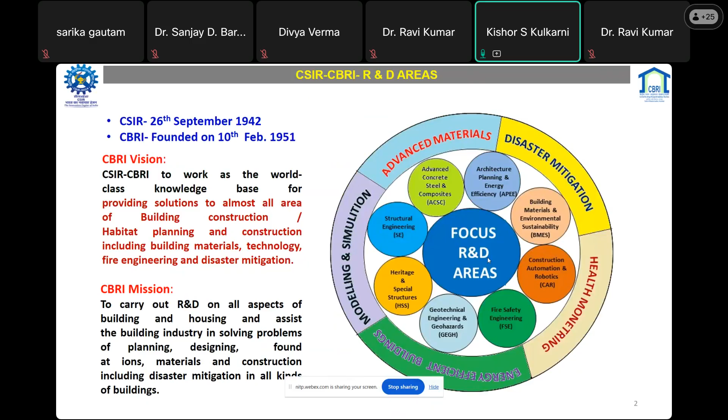As you are aware, we are facing a lot of challenges today, and there are certain issues. The challenges are with respect to some of the natural resources which are getting depleted. So we are facing a crisis on that, and also because of some man-made disasters. Because of that, we are facing this problem, and we can say climate change is the biggest issue, and this is because of factors such as greenhouse gas emissions and other things.

If we see greenhouse gas emissions, the major contribution is carbon dioxide, which is 77%. There are certain other greenhouse gases whose contribution is very less, and their impact may be more than other gases, but the majority share lies with carbon dioxide. So people are more focused on carbon dioxide and CO2 related industries, and how we can reduce the emissions. In the case of buildings, there are two major sectors: one is the cement industry, another is the steel industry, which produce a huge amount of CO2 emissions.

And in case of the building, if we consider through building also, there are greenhouse gases which are getting formed, not directly but indirectly by the usage of electricity and the heat. If we design buildings properly, then we can reduce the CO2 emissions. And for that, today's topic is energy efficient building designs, and particularly this FDP program, which is on the net zero energy building, which is much more important.

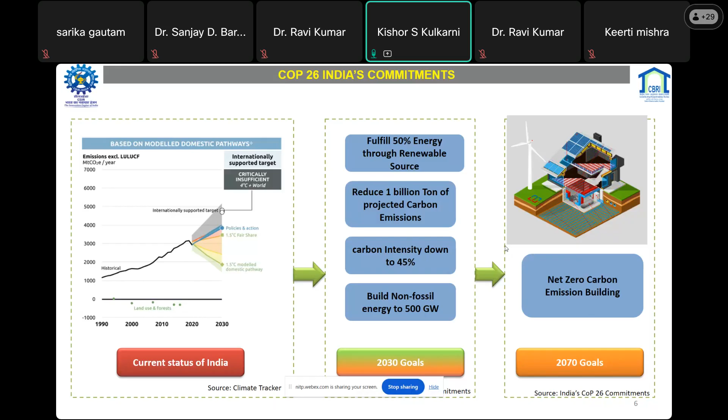That means if we consider the lifetime of a building is 100 years or 80 years, then we consume energy, and that creates a bigger impact rather than the building materials we are using. So for that purpose, building designs are very much important, and for that there are certain philosophies and principles that we need to consider. And for that there are certain sustainable development goals.

And particularly in the building or construction industry, there are certain roles wherein CBRI plays a major role, that is affordable and clean energy, clean water and sanitation, industry innovation and infrastructure, because infrastructure is one of the biggest pillars, sustainable cities and communities, and climate action. And with respect to this, there are certain areas wherein new innovations are being considered, and R&D activities are undergoing at CBRI.

So that may be carbon neutral material, how we can reduce the embodied carbon, how we can utilize the material by using the CO2 emissions. Other things: innovation in architecture planning; climate intelligence and integration, how we can collect futuristic data, create algorithms, and design buildings with respect to that; innovation in materials, like smart materials, bio-based solutions or self-healing structures; energy efficient systems, maybe passive design principles or integrating renewable energy sources; and resilient infrastructure, wherein CBRI is contributing.

So coming to the topic of today's presentation, first we should understand that in a building heat gets transferred, and that phenomenon is generally taken with respect to three things, that is conduction, convection and radiation. These are the heat transfer modes. In conduction, as we are aware, heat is transferred through solids, through the solid particles, without any motion of the material; the material will not move, it is stable.

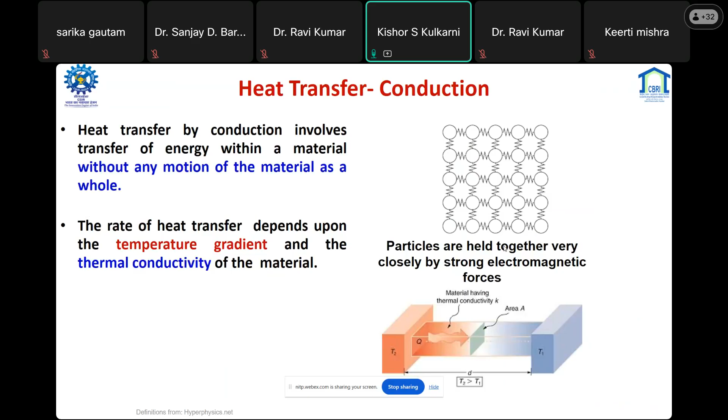So the rate of heat transfer depends on the temperature gradient and the properties of that particular material, maybe specific heat and thermal conductivity, and based on that, the conduction speed matters. Obviously heat flows from higher to lower temperature. Another phenomenon is convection. Convection is where there is a mass motion of the fluids.

The best example is if we heat the water, we can feel that there is a movement of this fluid. When that particular mass of water is heated, it gets circulated, it comes up, there is a circulation. This phenomenon is considered convection. And through windows, where air is circulated and ventilated, heat is also transferred from inside to outside or outside to inside based on the climatic conditions. So this is one thing.

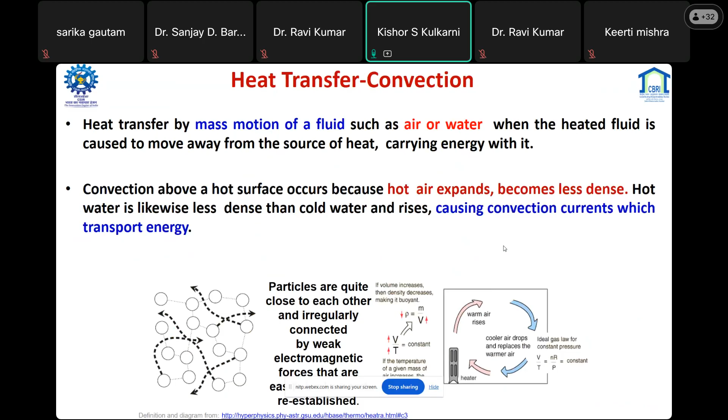The third phenomenon is radiation, the emission of electromagnetic waves which carry energy away from the emitting object. In the case of the building, the sun is the source of energy, and through the solar radiation coming inside the building, heat is getting transferred. So that is what radiation is.

If we consider these three phenomena together, that is heat flow through building envelopes, there is certain heat transferred inside to outside or outside to inside through conduction, radiation, and convection, and there may be some mechanical devices too. For example, computers, office equipment, or any other equipment also generate heat. Evaporation also takes heat away. So in the building, all these phenomena are taking place.

As we know, heat is transferred from the higher temperature to the lower temperature. Heat flow is not always steady state, it may be transient, so we should understand what is steady state and what is transient. In steady state, temperature is constant at any time. Generally this is not the real condition, but we assume the outside temperature is constant, or the inside temperature is constant, say maintaining the room at 27 degrees centigrade, and if outside is lower, heat is constantly going out.

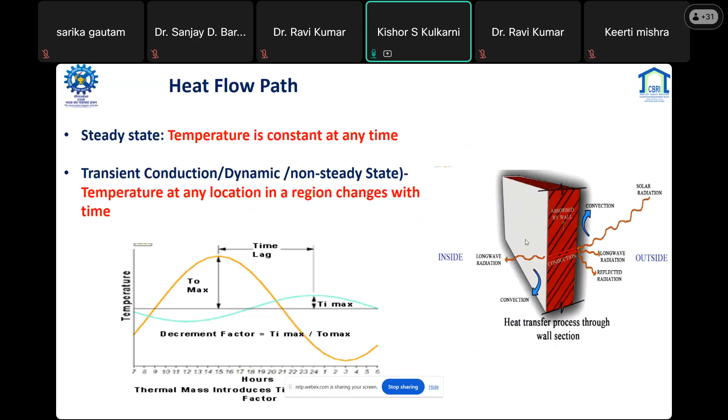The difference between the time of maximum outside temperature and maximum inside temperature is considered the time lag, and other factors are also associated. If we consider this wall envelope, where heat is transferred from outside to inside, long wave and short wave solar radiation is incident on the wall, the wall gets heated, and through conduction the heat is transferred. So in the heat flow path there is conduction, either steady state or dynamic.

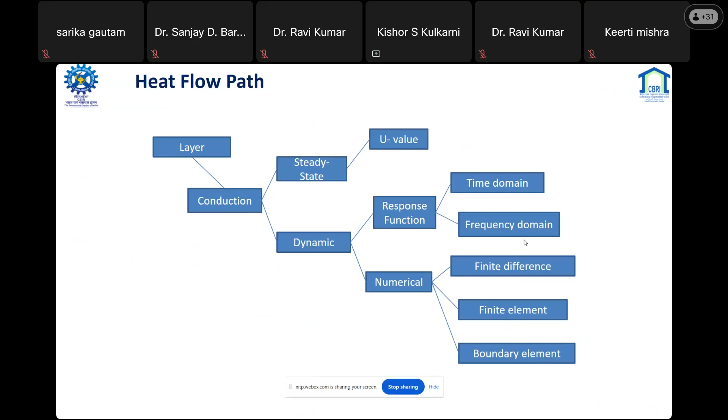In steady state, we look at the building properties; the U value is one property of the envelope, through which we can calculate the quantity of heat transferred inside to outside or outside to inside. The dynamic one is time-based, using numerical methods like finite difference or finite element methods, or response functions in the time domain or frequency domain. In today's presentation, we are just touching on how steady state heat flow takes place.

Suppose, for example, steel is there. Through steel the conduction takes place rapidly as compared to other materials, and that is because of thermal conductivity, which may be associated with the density of that particular mass and the properties of that particular material.

For example, in case of surface properties, you may be aware of perfectly black body and white body. White is reflecting, that is a property of that particular paint, related to radiations based on that. That is the material property. In case of the black body, it will absorb that particular heat.

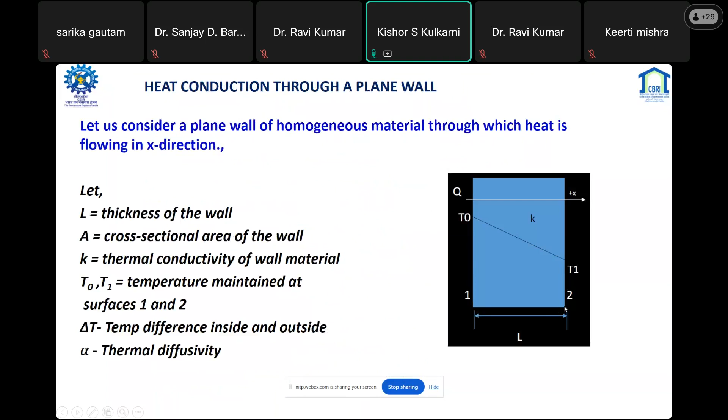And if we integrate, we get the constants C1 and C2. If we calculate and put the boundary conditions - at X equal to 0 at one time, and X equal to L with respect to the length - at X equal to 0, T is equal to T0, and at X equal to L, T is equal to T1, that is outside and inside temperature. If you put these boundary conditions into these equations, we can get an equation which shows that temperature varies linearly with the X direction.

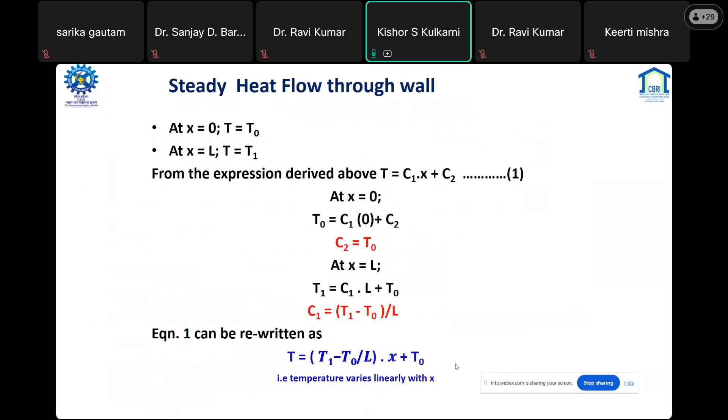If we put this in and do the calculations, this equation tells us that temperature varies linearly with respect to distance. That means it is a steady state. Another thing is that the temperature distribution is independent of K, because in this particular equation, there is no K present. So it is independent of thermal conductivity, the temperature distribution.

So if we apply Fourier's law of heat conduction, and put this T into this particular equation, and differentiate, we get the equation Q is equal to minus KA times T1 minus T naught divided by L. And if we put the value of K by L as thermal transmittance, this equation becomes simple: Q is equal to UA into delta T.

With this, we can find out what the heat transfer is in this particular wall. For example, but we know that walls are not made up of only a single material.

Walls are generally made with different materials. The outside layer may be plastered with cement plaster, and the inside layer plastered with cement plaster and putty as well. In this case, the different layers have different physical properties, there may be different thermal conductivities. So if we want to calculate the heat flow, we have to consider each layer, and through each layer, if we calculate, we get this kind of equations where the property of the building that resists heat flow is considered as the thermal resistance of that particular wall envelope.

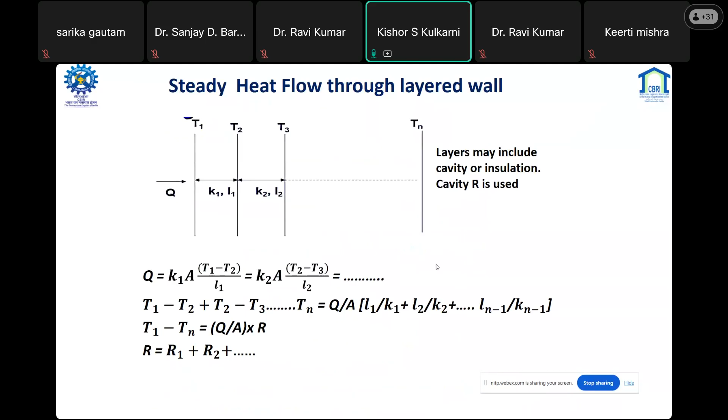So layers may be included, or insulation if we use, or cavity, that is also considered as insulation only. So if we put all together, we get an equation like this, wherein we can see the thermal gradient through the cross section of the wall. So at last we get Q equals UA delta T.

So this is the equation. With this we are able to get the steady heat flow. And based on this steady heat flow, we generally calculate how many mechanical devices we need to put inside so that we can get thermal comfort. So this is the basic basis in order to calculate what is the heat load.

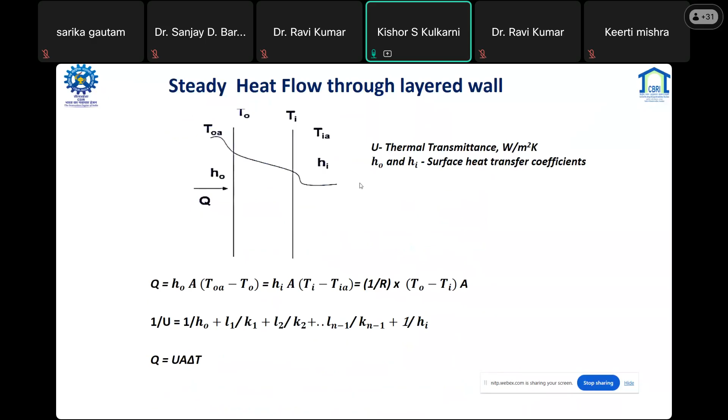For that, we have to provide mechanical solutions like air conditioning. So again, for different walls having different areas, all together we can calculate and get one particular heat flow value. So there is an internal and external temperature that is also there.

For this particular presentation, we have restricted to steady state only, in order to understand how this heat transfer phenomenon takes place, how we can calculate the heat load, how material properties are important, what the different layers are, and how it matters how much heat comes at what particular time period. So obviously the U value is generally considered for the steady state, because it comprises all the values.

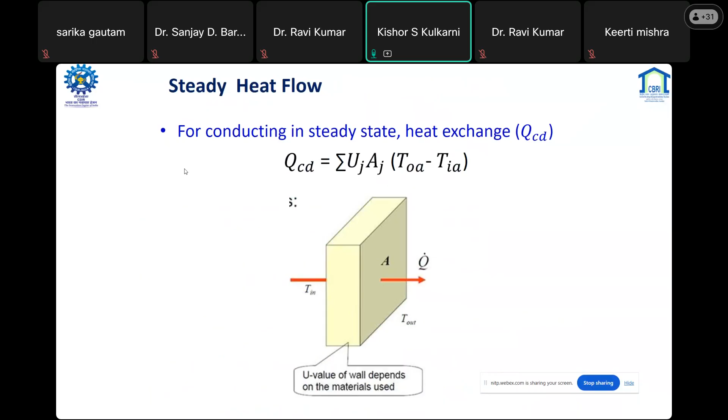So as I'm talking about the different thermal parameters, thermal conductivity is one parameter, and the last one is thermal transmittance, that is the U value. In between there are certain definitions associated with the properties of that particular material: how much resistivity, how much conductance, resistance, and specific values there are. These are certain physical terms associated with material properties.

The general unit for transmittance is W per meter square into K. So that's why Q equals UA into delta T. With this, Q is measured in terms of watts, so we are able to get it.

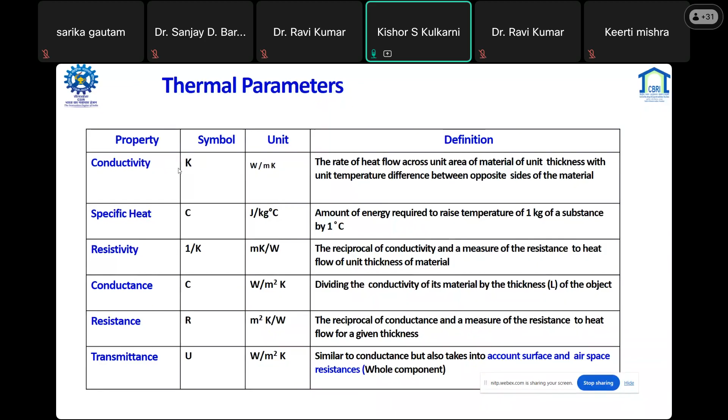So in our CBRI, we have this guarded hot plate apparatus wherein we can measure the thermal conductivity of different materials. For example, in order to understand conductance, if we look at a 100 mm brick and a 150 mm concrete, the thermal conductivity of both materials is totally different.

As we are aware, we don't feel comfortable in concrete houses if our walls are concrete, roof is concrete, and our flooring is also concrete. For example, when we go out during the daytime and all the doors and windows are closed, then when we return at maybe 5 or 6 o'clock, we feel that even though outside temperature is less, the inside temperature is huge. That means because of these thermal conductivity values and the time lag, we are getting this difference in temperatures.

So for example, resistance, if we put the values, the resistance of brick is more compared to the concrete value, even though the thickness is less. So different layers have different resistance values.

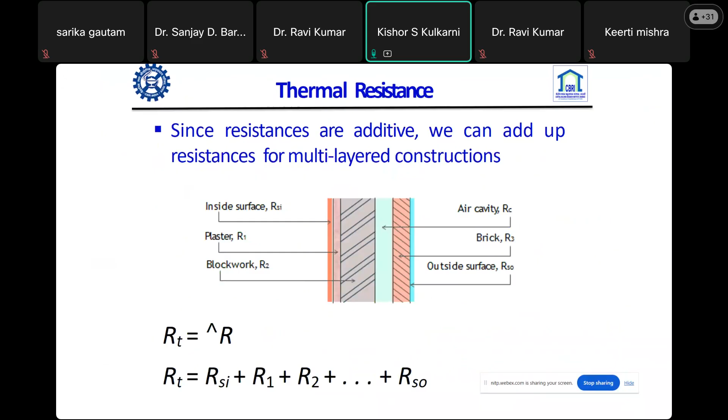Effect of radiation is another thing. As mentioned, there are three things: conduction, convection, and radiation. That depends on how much heat is absorbed, and the example is a perfectly black body. Black materials absorb more heat, whereas white materials reflect that heat.

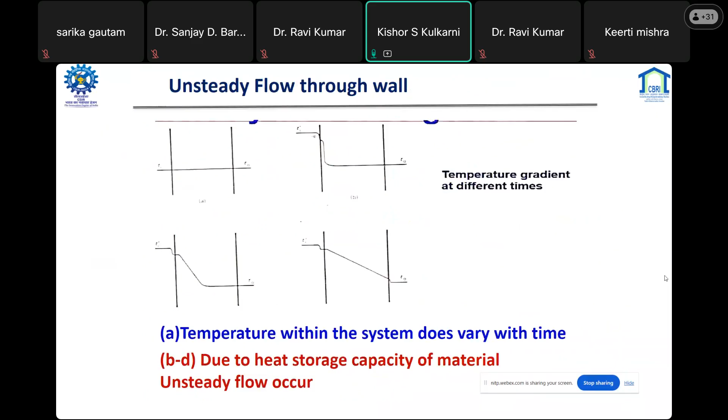So obviously a light wall has different behavior, whereas a heavy wall has different behavior. Because of this, with low and high thermal mass, the time lag changes. If high thermal mass is there, the time lag will be more. If thermal mass is less, and thickness is less, time lag will be less.

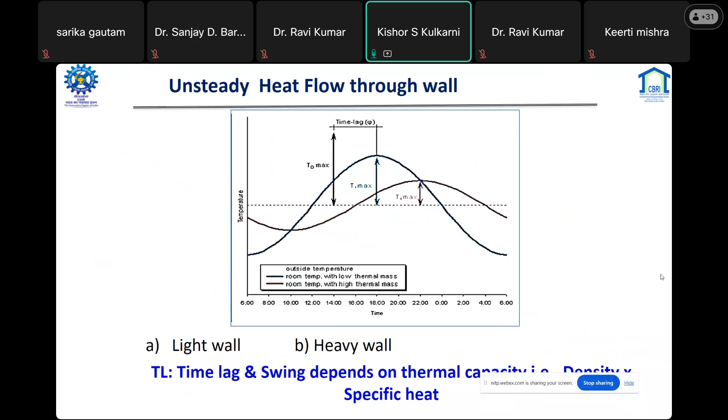There are certain equations, and with these we can calculate the time lag.

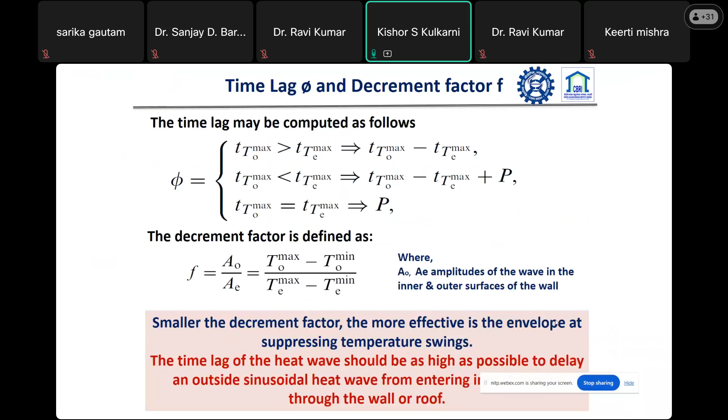So for thermal loss, if we provide the building with only insulation, that also will not solve our purpose, because we have to provide both thermal mass as well as insulation. So our wall element should consist of everything, not only insulation, not only thermal mass.

If we put more thermal mass, we can increase the time lag. In earlier buildings, the wall thickness was huge, up to 600mm, restricting heat entry through the time lag process. As heat comes inside, by increasing the time lag, during late night hours that heat enters the building. But by then, if you open windows for cross ventilation and natural ventilation, the heat is taken out, not during peak time.

High density material like concrete, bricks, and tiles require a great deal of heat energy change. But if we provide very little thickness of concrete and other materials, the time lag will be less, and heat will come inside more quickly through it.

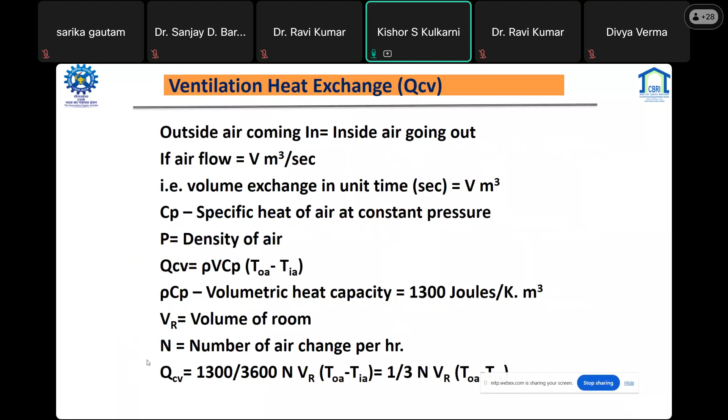I have not taken details of this one, so just to introduce it, I have covered a little bit.

For radiation, Q equals I times A W times theta, because the area of the window is the main source through which, whether window or door opening, if open, radiation comes inside. Through that we can calculate the intensity of radiation. The radiation intensity may be high at peak hours, and for that the solar path diagram plays an important role. Through the solar path diagram we can find out the orientation of the building, and which opening is subjected to heat entry. We can calculate that kind of thing through this.

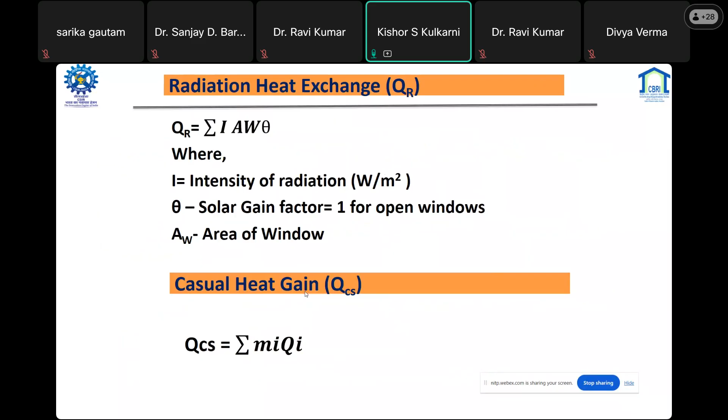As mentioned, thermal transmittance is related to steady state flow, whereas thermal admittance is related to unsteady flow. The thermal performance of walls and roofs can be measured with two parameters: insulation and thermal mass, and thermal transmittance. Thermal transmittance relates to steady state, and admittance relates to unsteady state.

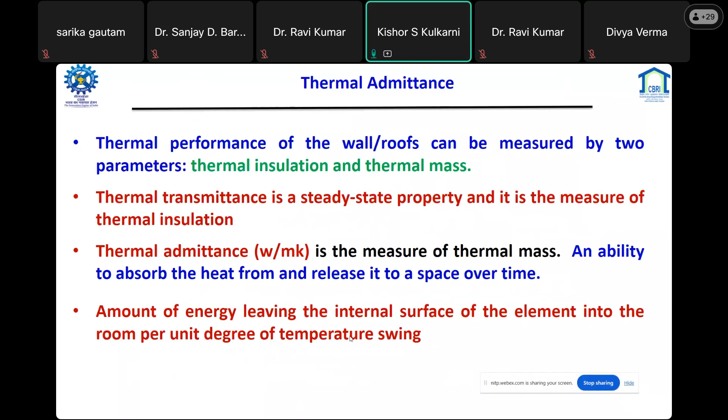The amount of energy leaving the internal surface of the element into the room per unit degree of temperature swing is the definition of admittance. As mentioned, with the example of fluctuation in mean temperature, that fluctuation we can calculate with the admittance parameter.

So if we want to reduce the loads, that is either heating load or cooling load, then in case of the thermal transmittance, we have to consider as low as possible, and the thermal admittance we can consider as high as possible. So if we understand this, with this we can reduce this heating and cooling. So this is the first part of my presentation, which is on the heat flow through building envelope.

The another part, because one is the building envelope features and how these are behaving. Another is the climatology, because all this together depends on the climate, what kind of climate outside is there, and based on that how our building is performing. And generally we construct the buildings in order to get the thermal comfort inside the building. So that is our main functionality, apart from maybe strength, and it again protects against disaster. But also at the same time we construct buildings in order to get the thermal comfort.

Thermal comfort is necessary to create the indoor thermal comfortable environment, so that people can work, people can take a rest, and people can relax. So for that purpose, thermal comfort we have to maintain, and thermal comfort depends on various factors, maybe related to what kind of activity we are doing, what kind of clothing we have put on, or maybe other reasons. But with respect to the building, this depends on what kind of envelope we have put, what kind of openings we have given.

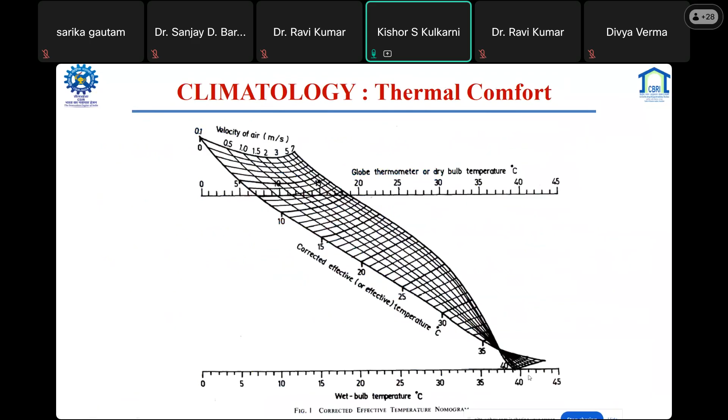There are so many indices, and as far as India is concerned, CBRI has developed the tropical summer index. That is our thermal index. There are others like PMV PPD, WBGT, and nowadays people have done adaptive-based also. This tropical summer index, developed by CBRI, is incorporated in the SP 41 code. As per definition, it is defined as the temperature of calm air at 50% relative humidity which imparts the same thermal sensation as the given environment.

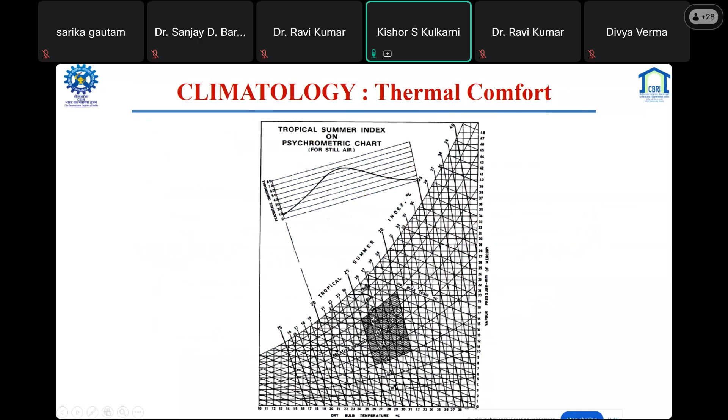Otherwise, at any point which is coming outside this one, we don't feel comfortable. So this particular range is given as 25 to 30 as a comfortable temperature, and the optimum condition is 27.5 degrees centigrade. So below 25 or above 30, we generally do not feel comfortable. So the uncomfortable starts at that particular time.

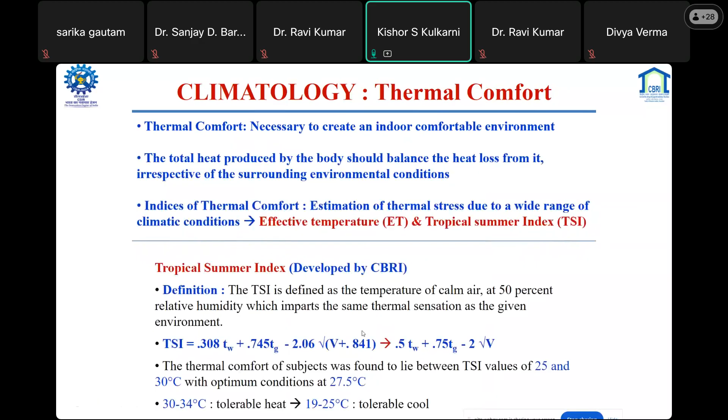And again, below 18 degrees centigrade or 20 degrees centigrade, we feel very cold. So tolerable cool is up to 19 to 25; below 19, that is too cool, non-tolerable. Then in that case, we have to depend on other things. So these climatic conditions, as I mentioned in the psychrometric chart, can be plotted, and we are able to get the season-wise comfort chart. For example, the warm and humid season, the hot and dry season, and the cold season are placed here. Based on the temperature and the humidity, we are able to see.

So how can we make our building thermally comfortable? Obviously there are certain passive design strategies through which we can reduce the temperature. These passive design strategies are the layout plans, building materials, orientation, and shading devices. If we can plan all that in advance, then we can create our house as a good, thermally comfortable house. And if it is thermally comfortable, then the load on the mechanical means will be reduced drastically, and your house will be an energy efficient house.

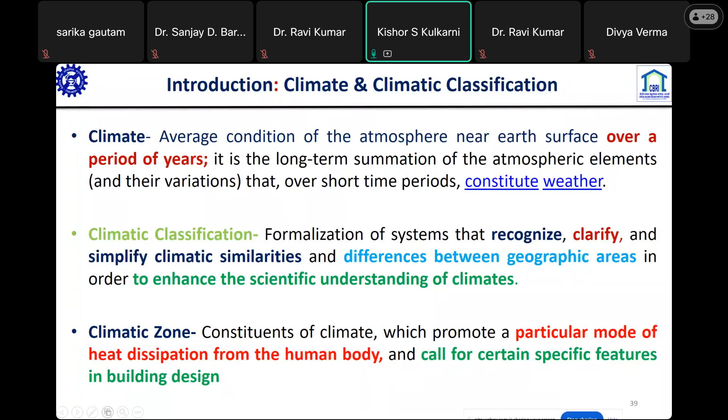So in India, there are 5 climatic zones at present as far as the code is concerned. Climatic classification is generally done by agriculturists, marine engineers, the transport industry, and other industries, and their application is totally different. When it comes to building design, the climatic classification is totally different. So the most important thing to consider is where we have to design that building, and the extent of temperature to which this building is exposed, and based on that we need to design. So climatic zoning is very important.

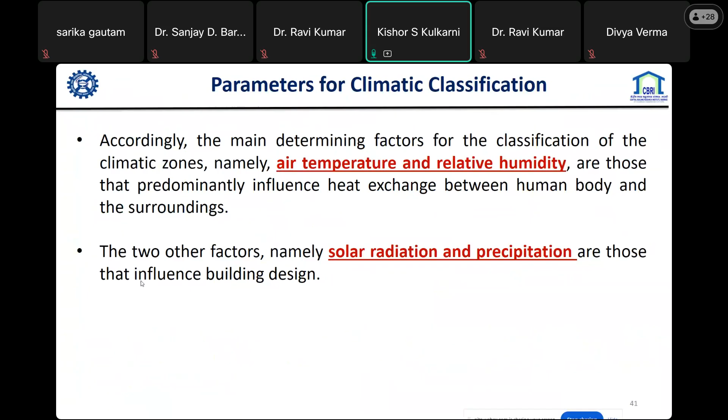So there are certain climatic classifications done by different people. They may be genetic-based or empirical-based. In the empirical case, we require all the data, temperature, humidity, precipitation, and based on that only we can do it. Köppen is the first one who started the classification based on empirical data. Earlier to that, climatic classification used to be based on the genetic basis, that is, the natural laws of climate formation.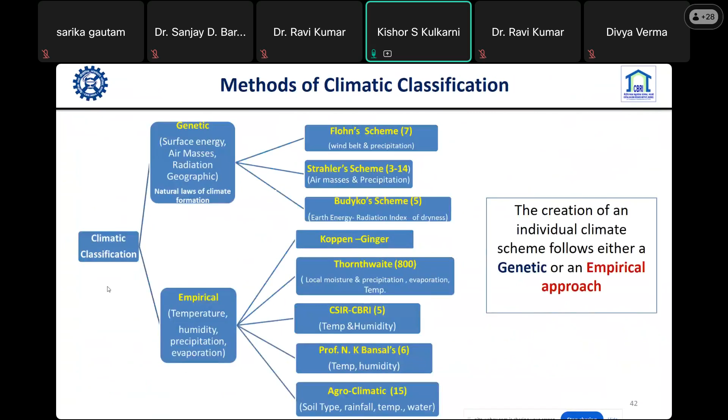So the first climatic classification done on an empirical basis is the Köppen one, and Köppen is considered the basic climatic classification. Whoever came after Köppen followed the Köppen classification and added some sub-climatic zones with respect to Köppen. Köppen worked from 1900 to 1940 and proposed a climatic classification. Later on, different scientists across different countries worked together.

In the Köppen classification, there are 5 broad climatic groups: tropical, arid, mesothermal, microthermal, and polar. These are the 5 main classifications. After that, they are again subdivided, and in order to set the criteria for these 5, there are certain criteria.

The winterless climate is considered to be tropical. Dry, where evaporation exceeds precipitation, is considered arid. The mesothermal or mid-latitude is based on humid mid-latitudes and mild winters; severe winters is the microthermal. And the polar one is where the average temperature of the warmest month is below 10 degrees centigrade. So this is the Köppen classification.

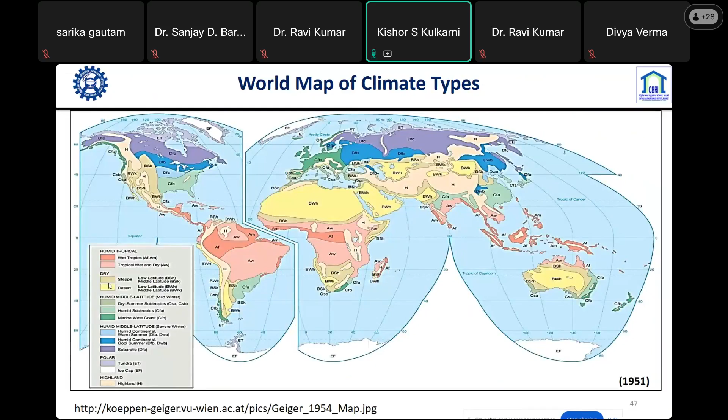Later on, he revisited and revised this Köppen classification, adding seasonal distribution parameters, temperature parameters, and some other parameters. So if you see the Köppen map at present throughout the world, this is what it generally looks like, based on 1951. After that, other scientists have also worked on it and presented similar things, but the Köppen is considered to be the base one.

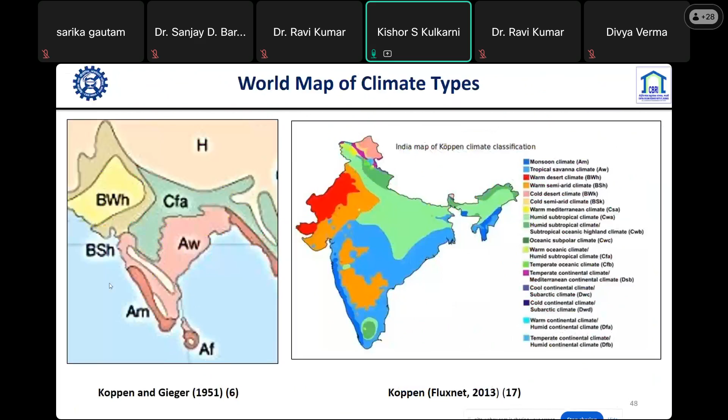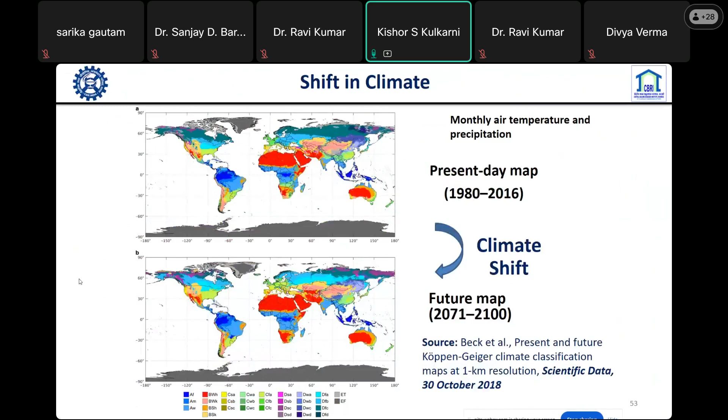So there is a shift in temperature, and if we consider the future, we can compare both maps and see how the climate is changing and the color shading is also changing. Climate change is generally not considered a new phenomenon; it has always occurred, but the intensity with which it is happening is a real concern for all of us.

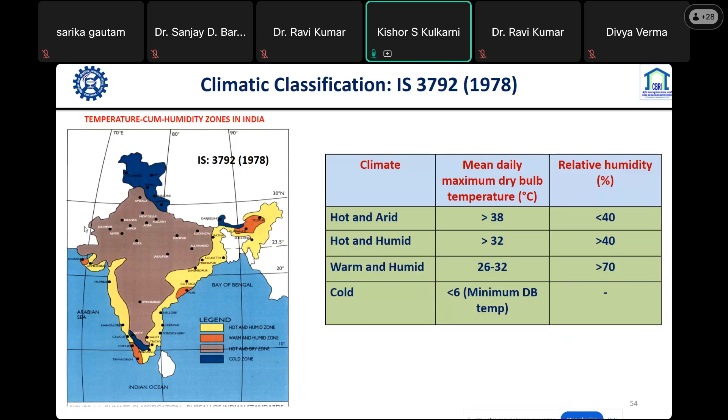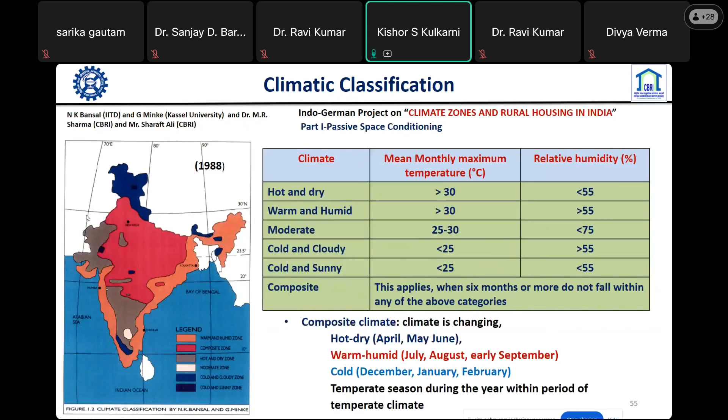This is an old map of India, where for building applications they considered temperature and humidity and proposed 4 climatic zones. Then scientists from CBRI worked again in the 80s and 90s and came up initially with 6 and later with 5 zones. The 5th group applies where for 6 or more months the temperature is not constant or stable, and that is considered to be composite.

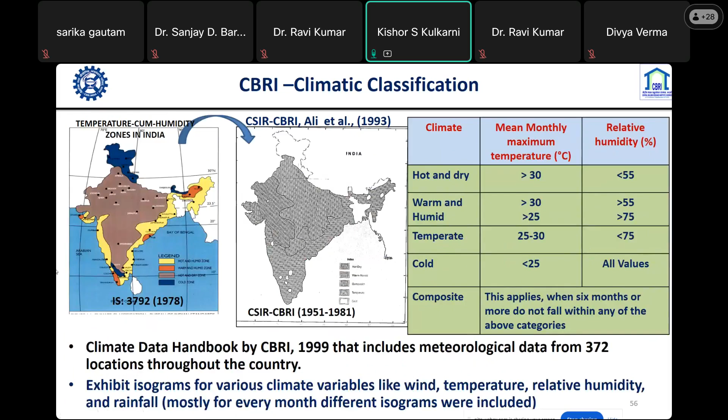These are the criteria: monthly maximum temperature and relative humidity. Based on that, we can segregate the zones. For composite, over more than 6 months there is variation. For example, in Delhi, the temperature changes every 2 months, and for that reason it is considered composite.

After that, CBRI scientists worked, and in 1993 they proposed these 5 climatic zones. Later, because climate changes are observed, we revisited it and, based on a different methodology, reclassified our Indian zone map, which was put forward to the BIS. Now a committee is formed, and based on its recommendation, this map will be revised and the new map added in the BIS code.

There are certain methods for climatic classification: degree days, cluster analysis, and administrative boundaries such as district boundaries. Based on that, we can decide. But India is, as I mentioned, a diversified country.

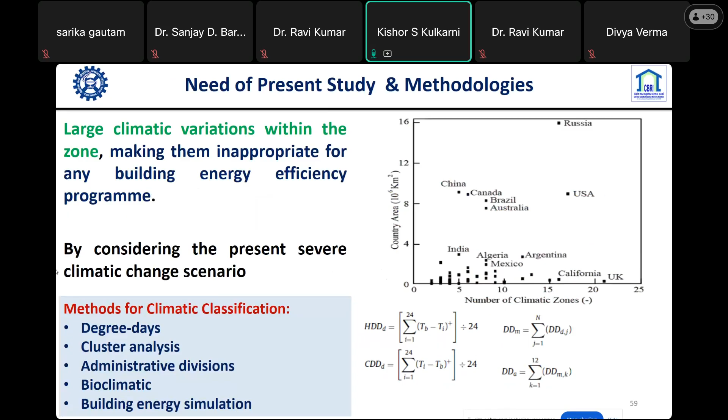The climate is diversified. Everything is diversified. So here, based on administrative boundary, we cannot make it. Bioclimatic things, building energy simulation, these are the things based on which classification is generally done. If you see this particular chart, even though India has a huge land, we have very limited zones, and some countries which do not have that much land have a different, even larger, number of climatic zones.

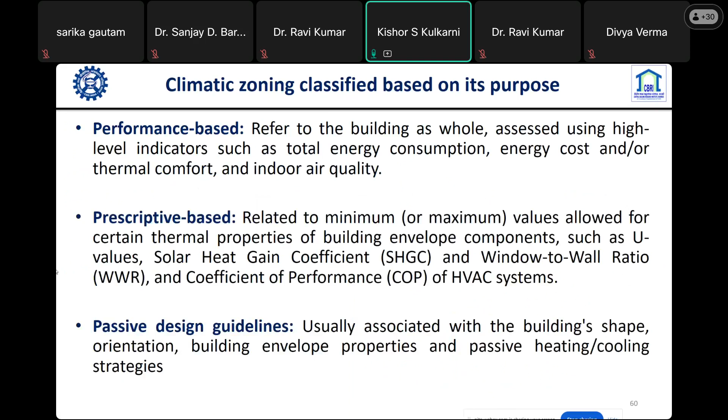So the climatic zonation is classified based on the purpose, that is performance based, prescriptive based, passive design guideline. Based on that, we can classify the zones. In our research, we have used hierarchical cluster analysis, and based on that, we have proposed a climatic zonation. There are certain methodology steps that I will skip here.

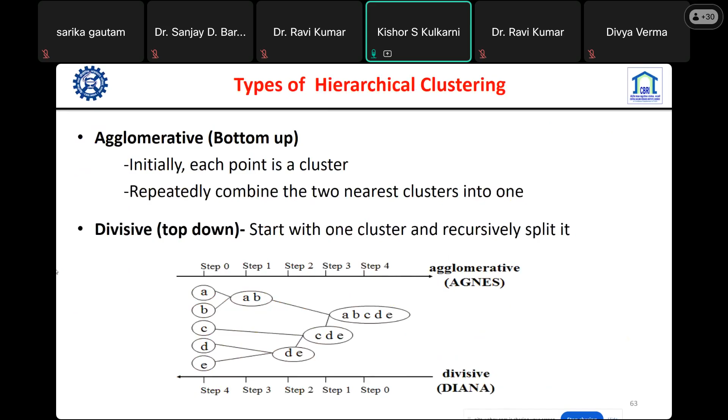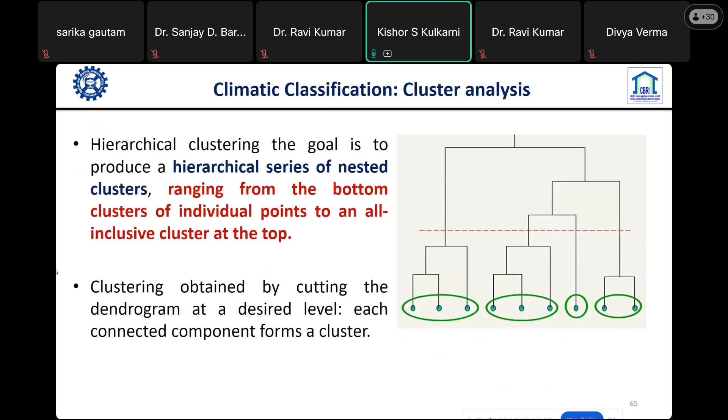So in a cluster, as we know, things which are common or similar are considered one particular cluster. The points which are nearer are grouped together, and those far away are grouped separately. That is cluster zonation. At the end, with this cluster zonation we get the dendrogram, with which we can identify the number of different groups which come under one category. You can see it from this particular diagram.

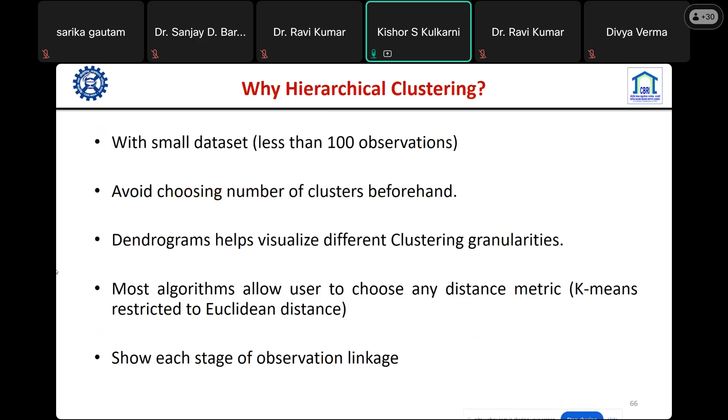So here we have used hierarchical cluster analysis, wherein we gathered data from more than 350 stations, and based on that we have done the clustering analysis and proposed climatic classifications. After taking that data, we checked for any missing values and rectified them. Before ArcGIS, we did the cluster analysis and principal components, and based on the clustering analysis and GIS, we mapped the climatic zonation on India's map.

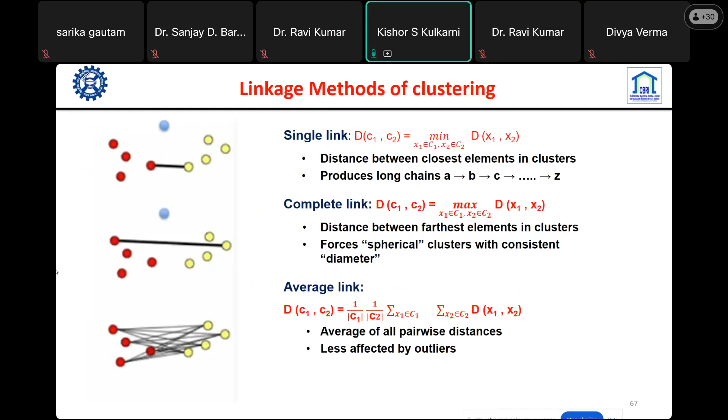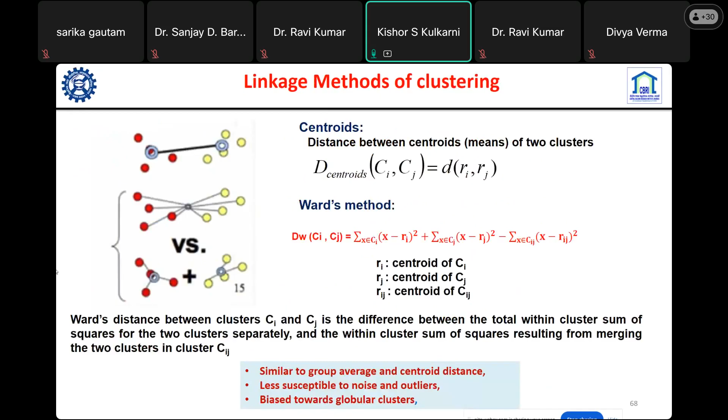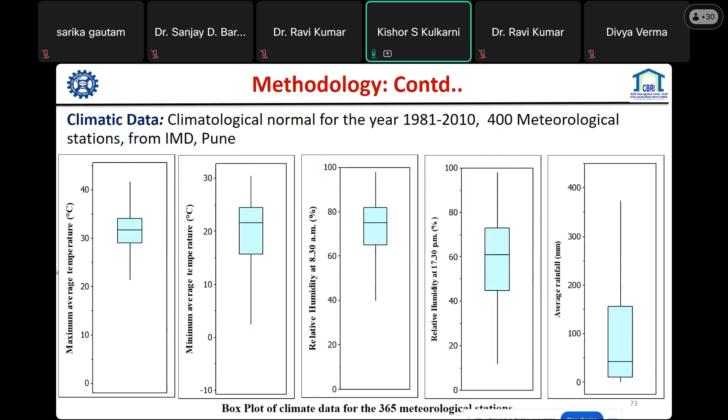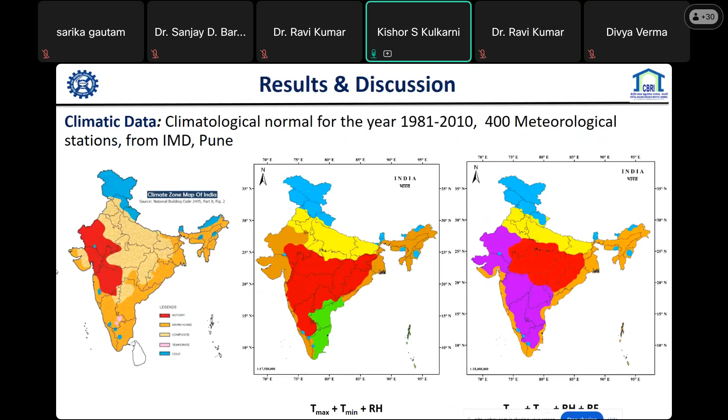As I mentioned, we have used certain methods, and I will take you directly to the research outcome. We considered 1981 to 2010, that is 400 meteorological data, and based on that, this is the classification being proposed. These are some of the results of the climatic classification.

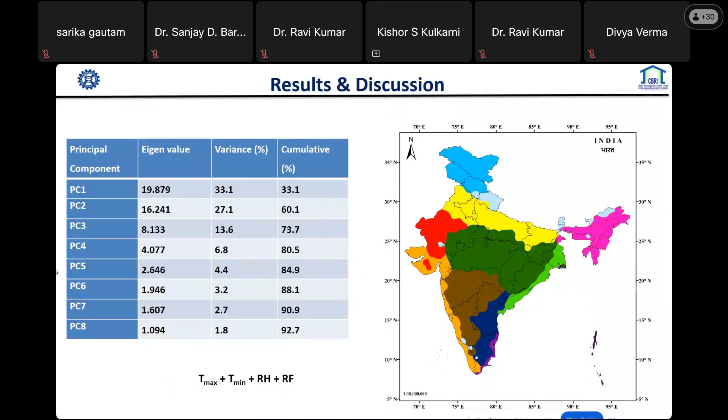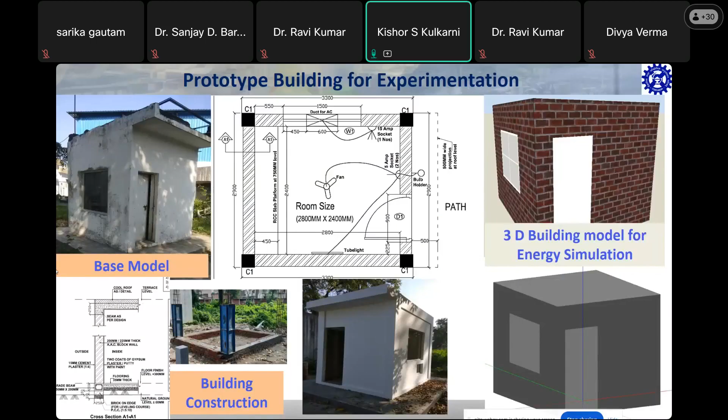So the climatic classification here is based on the cluster analysis, and after that we considered a prototype building, this base model, in the different climatic conditions. Through simulations we identified that if the same building with the same envelope is used in different places, its performance is different. For example, in Jaisalmer the energy requirement is huge because the cooling load is more. Similarly, some buildings require heating in December and January.

Some outside agencies like the Bureau of Energy Efficiency have rated buildings based on energy consumption. Obviously, we have to design our buildings to reduce energy. That is our main aim, and it can be done through passive strategies or active strategies. In case of active, we have to utilize renewables, but as far as possible, we have to reduce energy consumption. That is very important.

The climate and body heat loss also have a relationship. For example, in hot and dry climates, the human body loses heat by evaporation of perspiration from the skin. Suppose we are feeling heat; through sweating, the body is not storing the heat. To keep the body comfortable at a constant temperature, that natural phenomenon takes place. In fact, in our buildings we also use evaporative coolers, so that we can make ourselves comfortable.

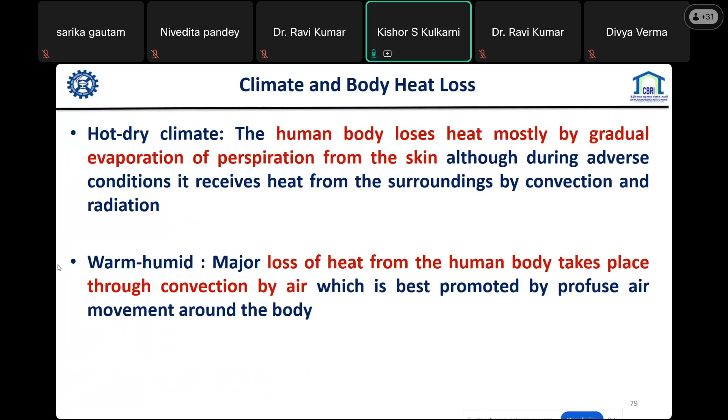So similarly, in case of the hot and dry, wherein the humidity is not there, through the humidifier we can provide the humidity. In case of warm humid, we have to dehumidify. So through the convection by air, if we can provide the air circulation, then in case of warm humid climate, we feel a little bit comfortable.

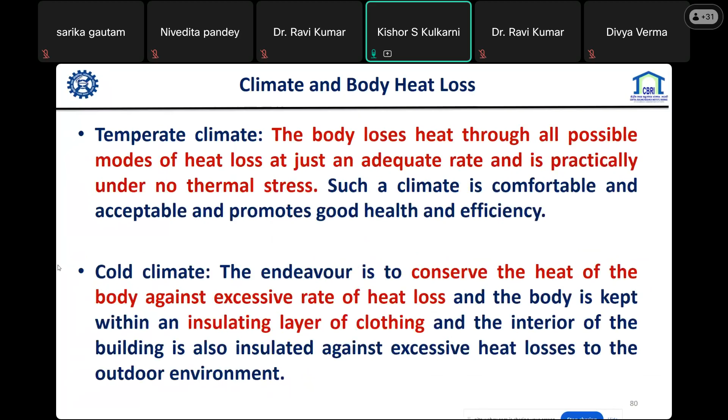We can relocate the kitchen well apart from the living areas, since the kitchen is producing heat, so that we can take it outside or away from the living areas, and provide roof overhangs so that we can cut down the solar radiation. And as we may know, thermal bridging: the chajjas get heated during the daytime, and because the chajja is a member connected with the internal surface, this heat is transferred inside the building.

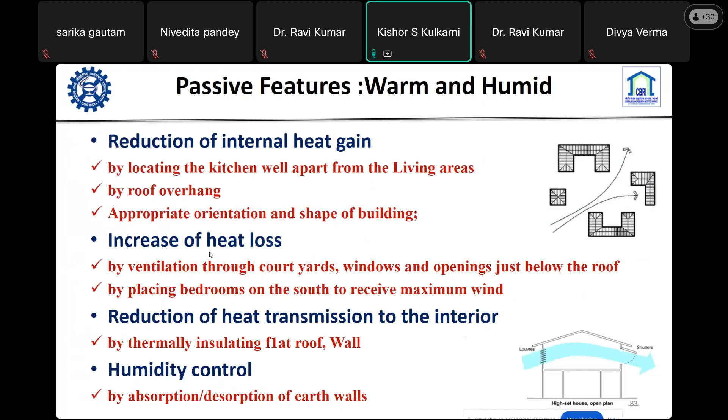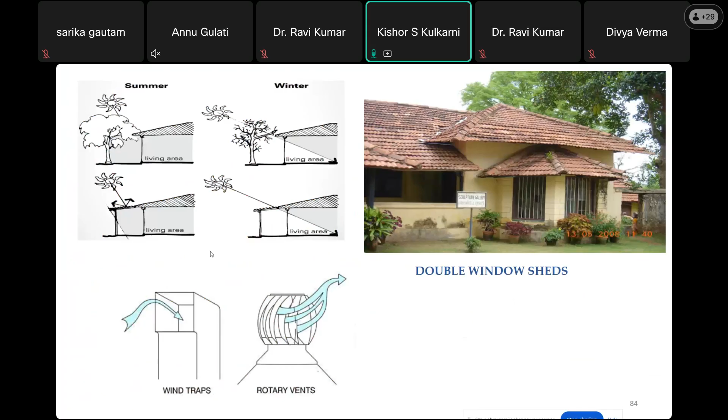How we can do that: we can properly orient our building, with smaller walls towards the east and west. Row houses can be made so that shadows fall on the other houses, and we can minimize the wall area. Overhanging roofs, large trees, and we can avoid openings. Massive structures can be made.

If we consider the example of Jaisalmer, Rajasthan region, their walls are constructed with heavy thermal mass, mud walls and stones, because stones have a high energy storage capacity. So these are also used in this hot and dry climate area.

We can increase the heat loss through evaporative cooling, and also put the courtyards and ventilations to the west side, or use a sprinkle water system. Through that we can balance the temperature fluctuations.

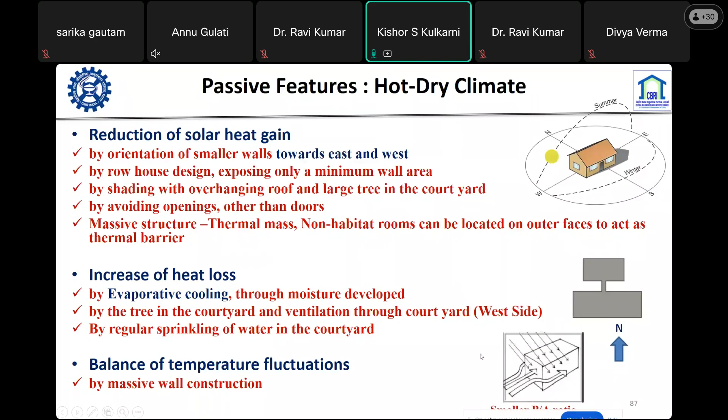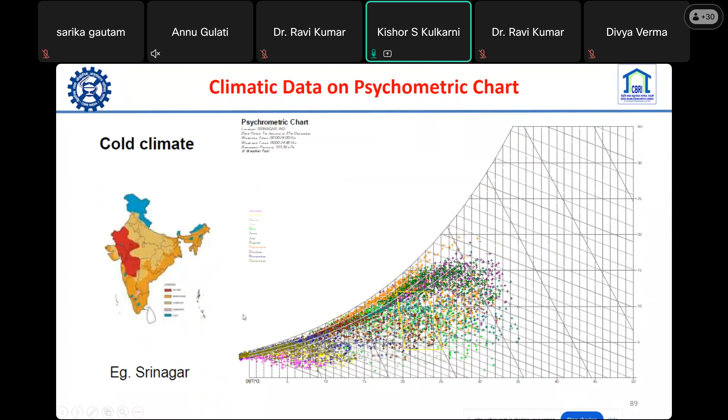In case of a cold climate, Srinagar is the example data point which lies in the colder region, and here we have to harness the solar radiation. That's why the longer walls face the south side, so we can harness the solar radiations, and on the north side we don't put any windows, so that we can obstruct and decrease the heat loss.

We can provide a false ceiling, avoid large openings, reduce window size, reduce the height of the building, and give small door openings. We can also increase the internal heat gain by placing the kitchen below, even though people are not accepting this.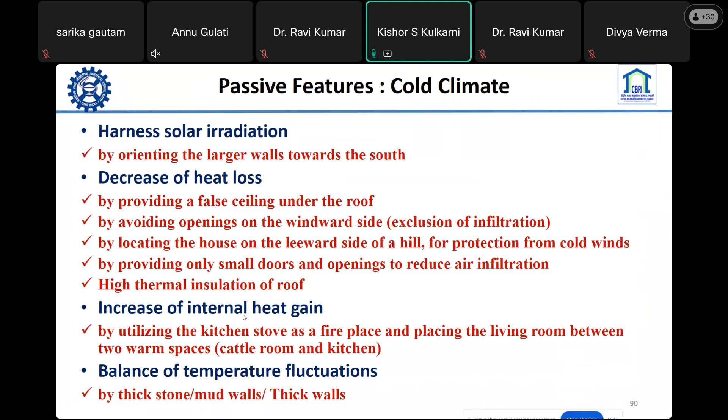But if we want to make our building climate responsive and climate resilient, these are the passive features which need to be implemented.

This is a typical example of the Leh Palace, which is more than 300-400 years old. The main thing is these walls are made up of locally available material, and these walls are thick ones, 600 thick, which obviously makes the building comfortable.

Coming to the last part of my presentation, that is thermal monitoring in buildings. So passive features are what we need to consider, along with the materials we are developing, the energy efficient materials.

For example, bricks. Generally we use bricks, but modern materials like AAC blocks are lightweight in nature, and there are certain advantages with respect to this block, because being lightweight there are certain pores inside it, and because of that we get a little comfort and can avoid unwanted heat entry inside the building.

For that purpose, what we have done here shows how important quantification is, and thermal monitoring is, in that sense, much more important. In order to do this, there are certain instrumentations which are required.

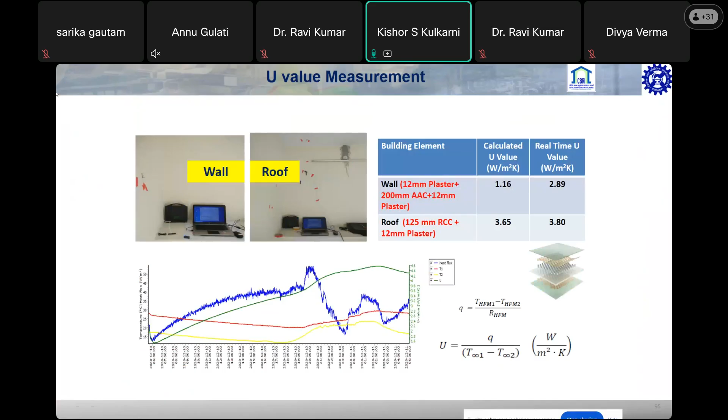We have also measured the U values. What we have done here is put sensors in these buildings, which we monitor through our data acquisition system.

Similarly, this is one particular prefabricated building made with the 3S system, wherein columns, beams and slabs are RCC, and the envelope material is made of AAC.

The thickness of this brick wall is 230mm, and this particular AAC wall is 150mm. If we consider the U value, for the 150mm AAC wall the U value is 0.62, whereas in case of the brick wall the U value is 2.17. Obviously the U value is more for brick.

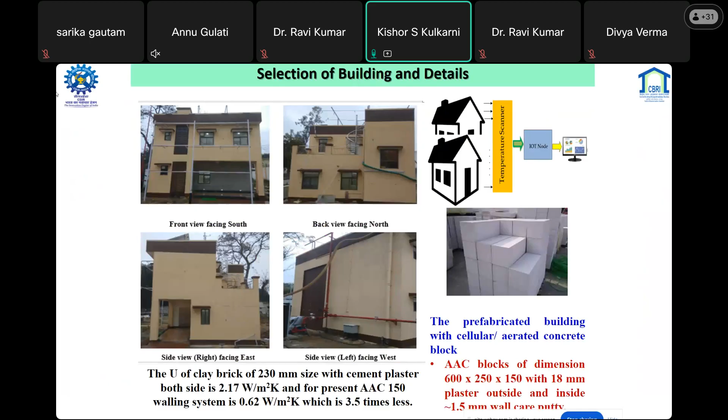These are the other dimensions, and this is the IoT setup we have developed for this building. In the rooms we have placed sensors outside and inside at the same location so that we can capture the fluctuations. As I mentioned, parameters like thermal load, time lag, decrement factor, all of that we have measured in this particular building.

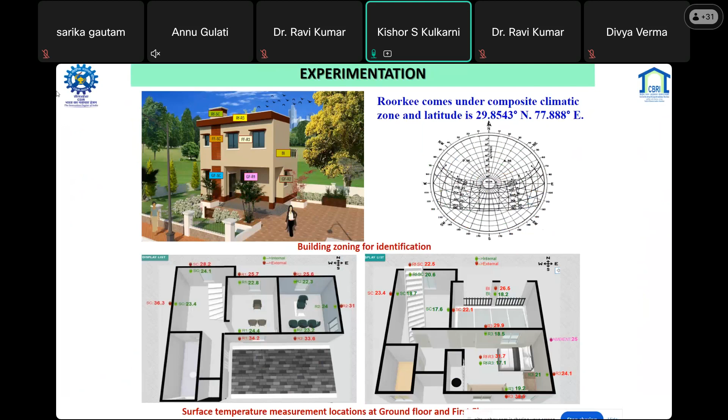As far as Roorkee is concerned, this is the solar chart for this particular latitude and longitude. Obviously during peak winter only, for 1 or 2 months, we don't have solar radiation. Otherwise there will be solar radiation, and these things are important in order to design the buildings.

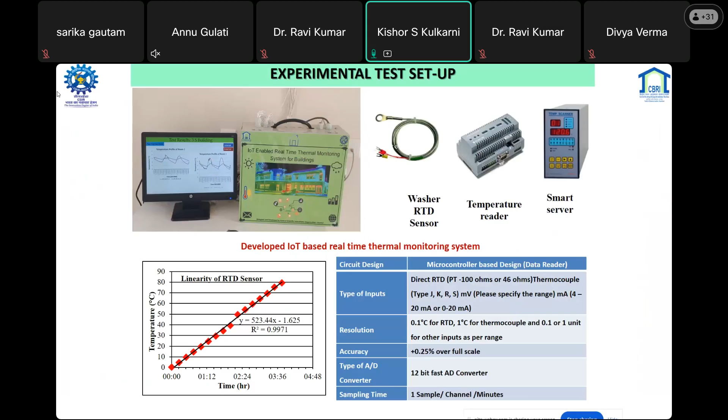Here, in our another lab CSIO, we have measured the temperature, and there are certain things wherein we need to check the accuracy of these sensors and do calibration. RTD sensors with a capacity of up to 250 degrees centigrade are used here, and humidity sensors are also used. Some other sensors like lux sensor and heat flux sensor are also used.

So this is the data we have captured through this setup. In a building we have put almost more than 30 sensors, and we have monitored outside-inside temperature variation during almost all the seasons. For one week in different seasons we have monitored the data, and this data gives us insight into the performance of these newer materials being used in buildings nowadays.

As we can see here in temperature monitoring, we have done surface temperature monitoring, putting sensors on all sides - south, west, east, north - everywhere. We have also put sensors on the roof. Almost more than 50 sensors were placed, and we got interesting results.

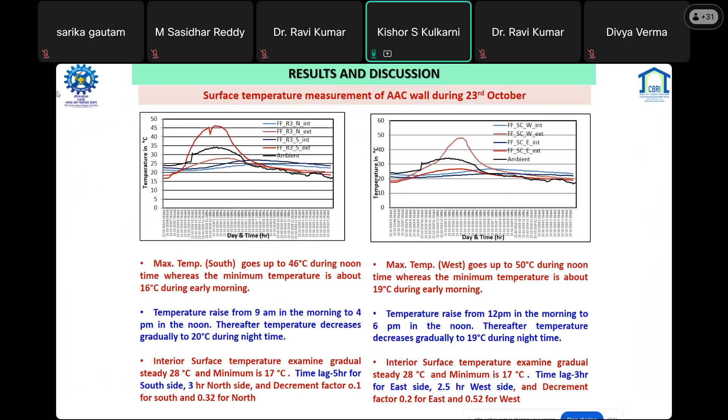Considering the south wall and the west wall, in the evening the sun goes to the west side, and there we got more temperature, with obvious difference between inside and outside temperature. Time lag in case of the west is less compared to the east side. Similarly, with respect to south we got a time lag of 5 hours, whereas in case of north we got a time lag of 3 hours. So there is definitely a performance change, and we can observe this through performance monitoring.

Regarding the temperature of the roof - most of the time the roof is exposed to solar radiation, always capturing heat and transferring it to the bottom. So roof temperature generally goes more than 58 or 60 degrees centigrade. If we consider building designs, the largest part of heat comes through the roof, and also the maximum portion of heat loss takes place through the roof - almost 45% of heat loss is from the roof.

So nowadays people are aware and are using cool roofing solutions over roofs, sometimes putting glazed tiles or mosaic tiles. Earlier we used to insulate with brick bat coba or mud, putting it on the roofs to insulate. Now technologies are changing and newer materials are coming into the market, which can be picked based on the area and the climatic variations in that particular area. Based on that we can provide the solutions.

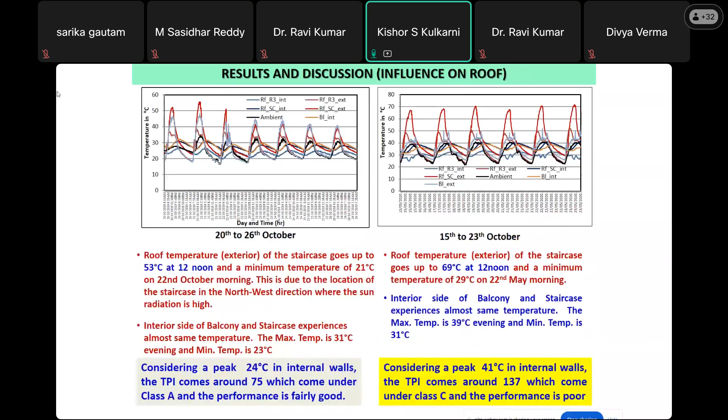Similarly, this is the AAC block data for different regions, since throughout the year we have measured it. In case of Roorkee, we get peak temperatures during May or June, and also measurements before peak summer and after peak winter. We monitored consecutively for 7 days continuously in different seasons, and based on that we got interesting results which are being analyzed. Based on this analysis we can calculate how much wall thickness we should provide, and what is the performance of the AAC wall versus the brick wall.

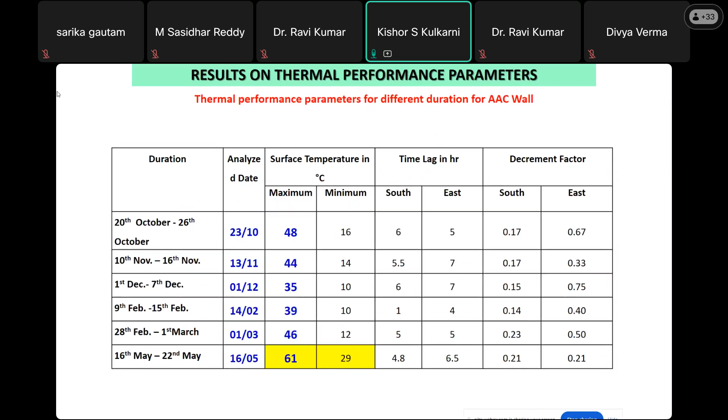For building wall performance, there are certain TPI values, thermal performance index values, which are nothing but TIS minus 30 degrees, into 100 divided by 8. That 8 is considered an 8-hour time period, and 30 is the base temperature. Based on that, TPI values of wall envelopes can be given gradings, such as good, poor, or bad ratings.

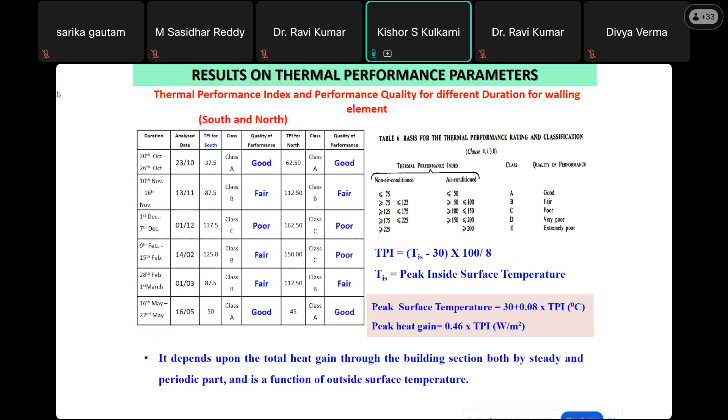So if we see the values, only if we consider during the peak winter and peak summer, the quality of this envelope is not sufficient. The performance is poor, meaning there are certain things which need to be taken care of. That kind of comment we can make.

Also, thermal comfort, as I mentioned, doesn't only depend on temperature, but other factors are also considered, like radiant temperature, air speed, and humidity. All these things need to be considered.

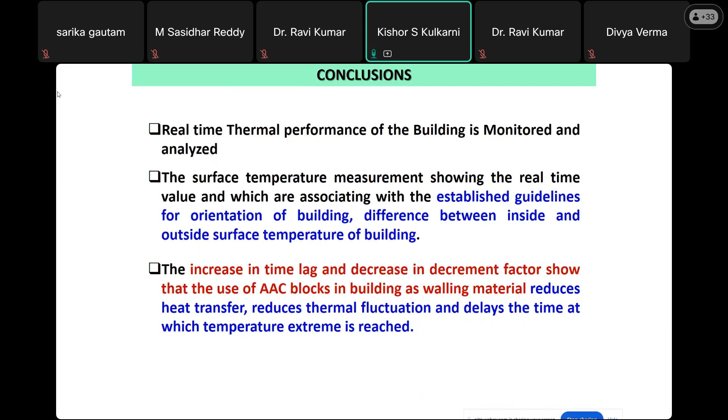So at last, to conclude, at our CBRI we have all kinds of setups to do real-time measurements, and we can also change the envelope. The Simpod facility is available at CBRI. That Simpod consists of a wall envelope, a frame envelope, wherein we can cast anything and test it in that particular building. That is the test bed setup, where we get an exact idea of how new technologies perform under our climatic conditions.

To conclude, it can be summarized that climatic types are important components in sustainable building design, in energy efficient building design. We need to understand the climate for which the building is designed. Based on that, the availability of locally available material and other things need to be considered. There are certain restrictions with respect to availability of space, materials, and skills. Based on that, we have to provide solutions, keeping in mind that climate is the main parameter, and based on climate we need to design.

So, buildings must be designed to fit in the climate in which they are built. That's why climatic zones are important, and based on that we need to design.

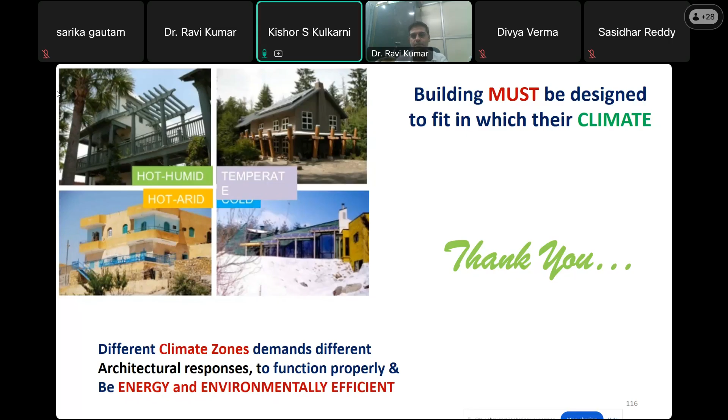And in our CBRI, we offer an internship program. So any of the students, if they want to come here and do their thesis, they are welcome. Or any small project also, if they want to come, they can come here. We offer this training. I think our other colleague, Dr. Tabish, might have mentioned this in his lecture.

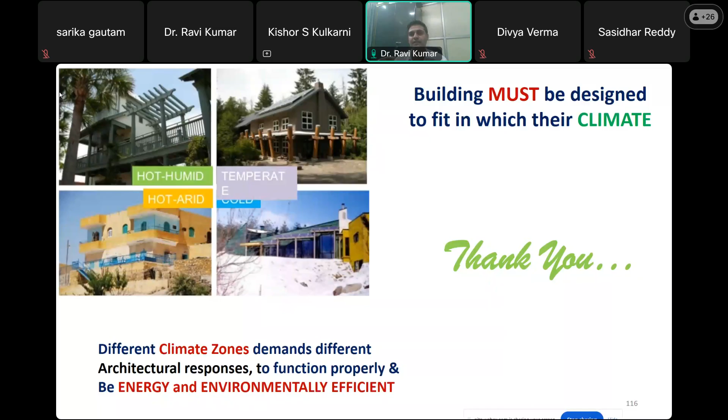So thank you all for attending this insightful session on thermal monitoring and energy efficiency of buildings, delivered by Dr. Kishor S. Kulkarni, Senior Scientist. Dr. Kulkarni provided a comprehensive overview of thermal monitoring, highlighting the importance of tracking thermal parameters and conducting steady state analysis to evaluate and enhance building energy performance. He also discussed its critical role in shaping energy efficient design strategies across cold and hot regions. He also shed light on passive design features such as orientation, shading, insulation, and natural ventilation that contribute significantly to thermal comfort without active energy use. He emphasized temperature monitoring in both existing and new buildings to support data-driven decision making for sustainable retrofitting efforts.